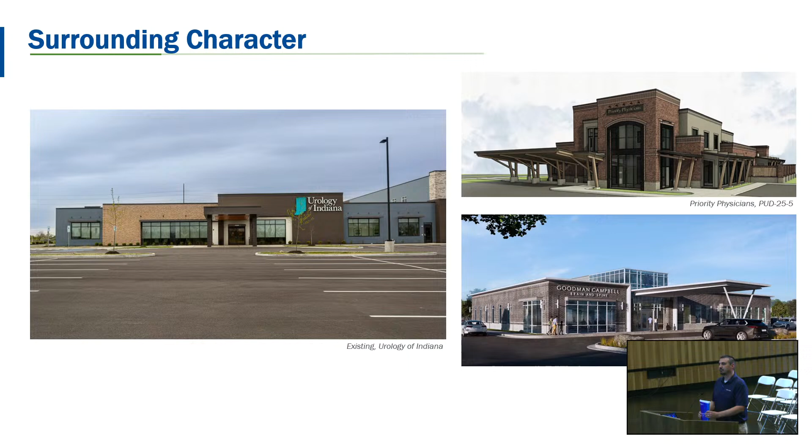Yep, that'd be great, thank you. Thanks, Pete. If there's no other comments, I'll make a motion to approve. Any other comments? I had one question, I guess.

On the site plan, you've got the parking primarily to the far east end of the property. Is the bulk of the rest of the parking kind of basically just on-street, that pull-in on-street parking? So this is kind of where they park on the actual site plan — there is parking on the west, on the north, and on the east, but the bulk of the parking is to the east. With the patients and what they do here, they don't get a whole lot of visitors. You come in, you stay there for 10, 12, 14 days, then you move on, so most of the parking is for employees, and they're more towards the back.

That's kind of what I was assuming, but it was a little hard to tell from the site plan since this is more of an architectural building focus. The full site plan has a row of parking along Jack Walker, a row along 136, and I think a row along 138 as well. And does that parking account for the future expansion as well?

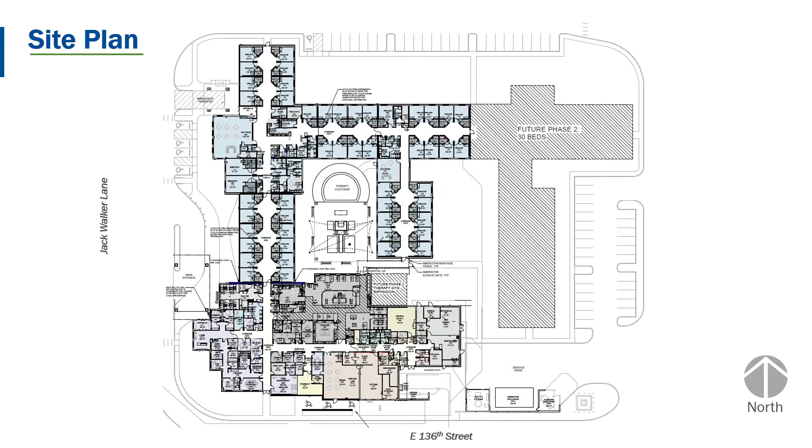Yes, there is a small future parking expansion that's located up against the pond power line easement. But the majority — when you look at the staff they need to operate the facility — the vast majority of the facility is staffed day one, the rest is just extra. You're not adding that much staff additionally, maybe 7 more nurses, doctors, or whatever. That was it, thank you.

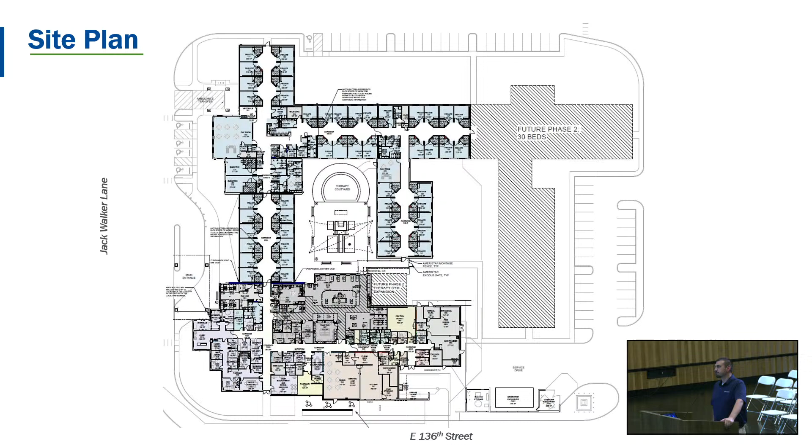Thanks, Sean. We'll entertain a motion. Motion. Yeah, motion with the TAC comments.

On the condition that all TAC comments are addressed, I move to approve. That's the general assumption, yes. Are you seconding? I'm seconding. So we have a motion by Pete, a second by Drew.

Roll call, Kate, please. Ms. Baumgartner, yes. Mr. Peterson, yes. Mr. Curran, yes. Mr. Bender, yes. And Mr. Stevenson, yes. The motion does carry.

Thank you. And I think I just learned a new word, photorealism. I can't pronounce it, though.

The next agenda item is case number PUD-25-11, 9160 Ford Circle. It's a request to approve an architectural and site plan for 9160 Ford Circle, a 28,000 square foot warehouse expansion with associated parking. And we have Christy Cashin again for the staff to present.

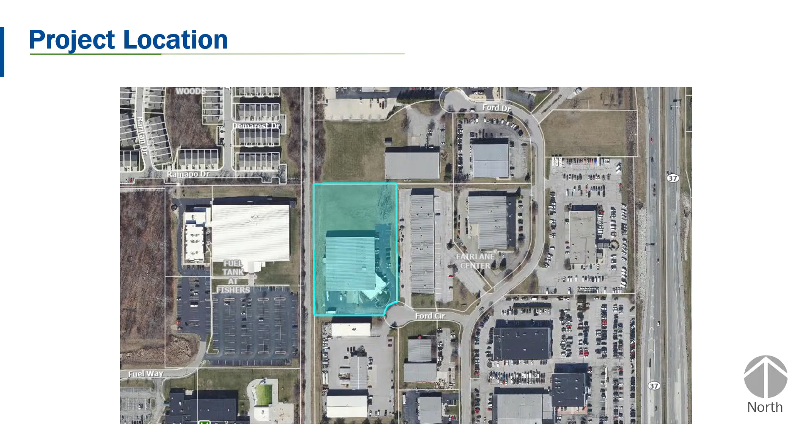Good evening, I'm Christy Ashton, Senior Planner with Community and Economic Development. The project before you tonight is a request to approve an architecture and site plan for a 20,000 square foot warehouse expansion at 9160 Ford Circle. This property is located in the Fairlane Center in Quebec PUD, ordinance number 061588. The site plan shows the...

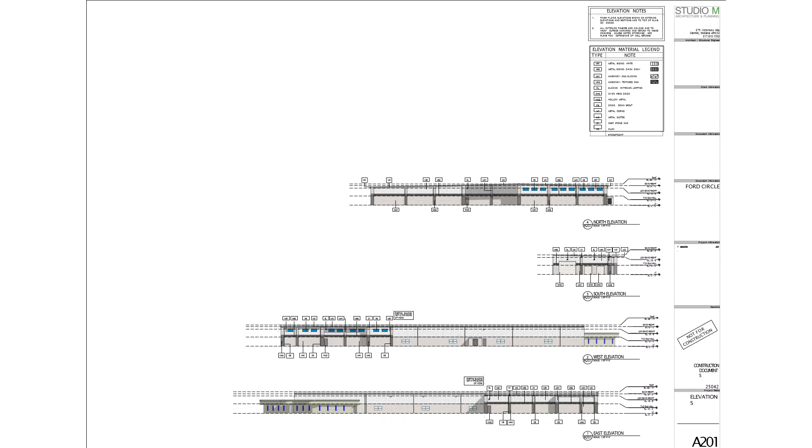Okay, and then the new overhead doors, are those just drive-in doors or are those dock doors? Can you say that again for me? You said there are 3 overhead doors. One is a... Okay. Okay, I was going to say, I'm not sure how you're getting a semi back there. That makes more sense. Yeah, okay.

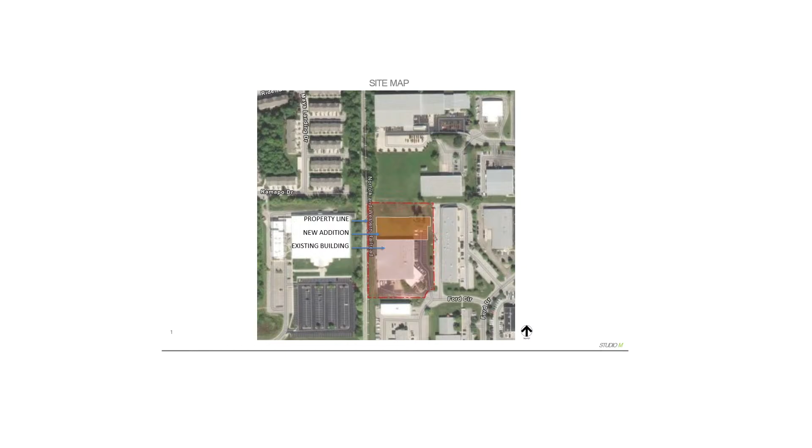Thanks, I think those are the only questions I had. Other questions? I would entertain a motion at this time.

Yeah, I'll make a motion to approve, pending the TAC comments approval. Second. I would like to say too, I do appreciate the effort that was put in on the expansion of the building to make it meet code and move up to the standards of the area, so I think it looks nice. Okay, we have a motion from Drew and a second from Pete.

Okay, roll call. Ms. Baumgartner? Yes. Mr. Peterson? Yes. Mr. Curran? Yes. Mr. Bender? Yes. And Mr. Stevenson? Yes. Thank you, the motion does carry.

We don't have any River Place PUD committee items. Any staff communications? Not tonight, no staff communications. We are adjourned.